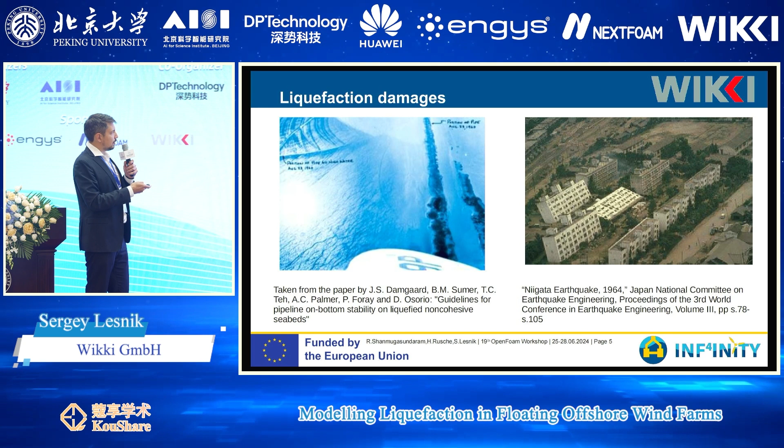Another picture is from Japan, 1964. There was an earthquake, and liquefaction may also happen. In this case, it happened due to waves. In this case, it happened due to the earthquake, which are also waves, actually. But the ground liquefied, and you see here the tilted buildings. So that's also one example.

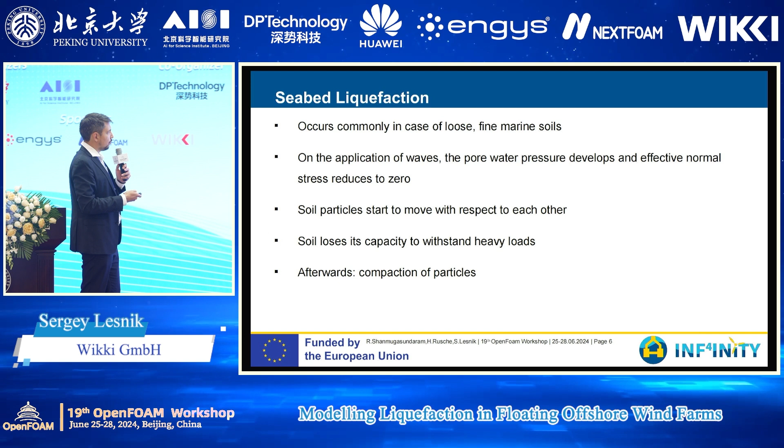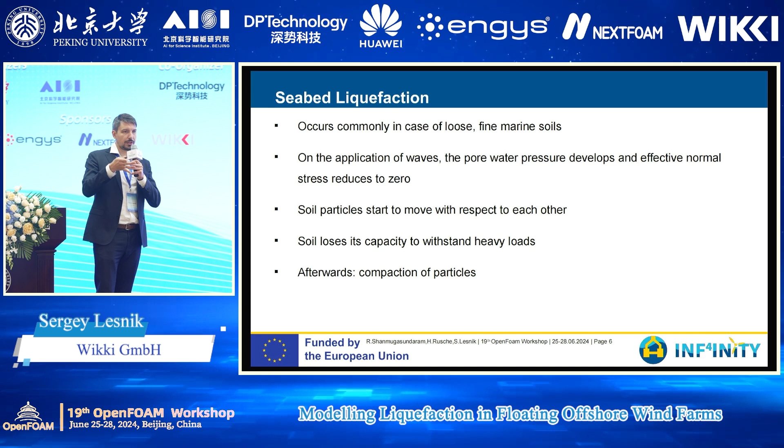Yeah, what is liquefaction actually? It mainly occurs in loose, fine marine soils. How it works: the application of waves builds up the pore pressure in the soil, and at some point the effective stress is reduced to zero. So the soil doesn't hold anymore. The soil particles start to move with respect to each other. The soil loses its capacity, and it cannot withstand load. And load may be an anchor or a pipeline, right? Afterwards, after the liquefaction, there is a compaction process where the soil particles get together again and compact.

So let's see this in a diagram and some pictures here. So here are the soil particles, there is some water trapped in between the particles, and it's some kind of solid structure like this, right? It's actually the seabed. What happens when you apply waves? You can see here on the y-axis we have period-averaged excess pore pressure. So it's the pressure inside these pores between the particles, and it starts to grow, right? You apply pressure,

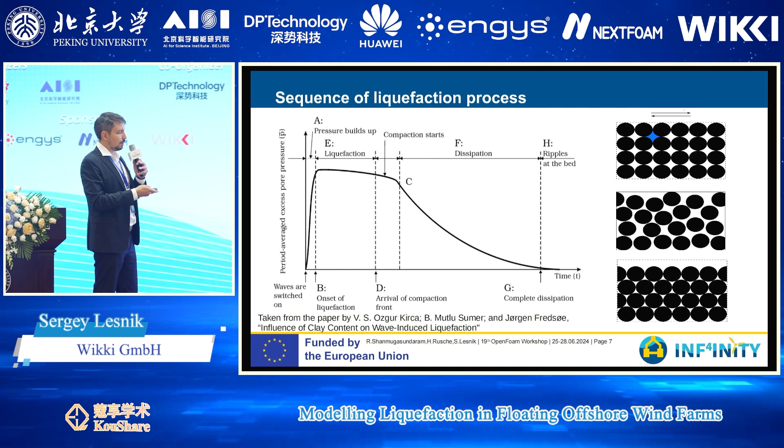and the pore pressure also grows, and this pore pressure may get so high that it pushes away the solid particles, right? So this one, you can see here, that's the phase where the soil liquefies. So there is no structure anymore because everything has been pushed away. But after this, the particles settle down. It's a compaction, and they compact to a solid structure. So we have a phase change here from solid to liquid and again to solid.

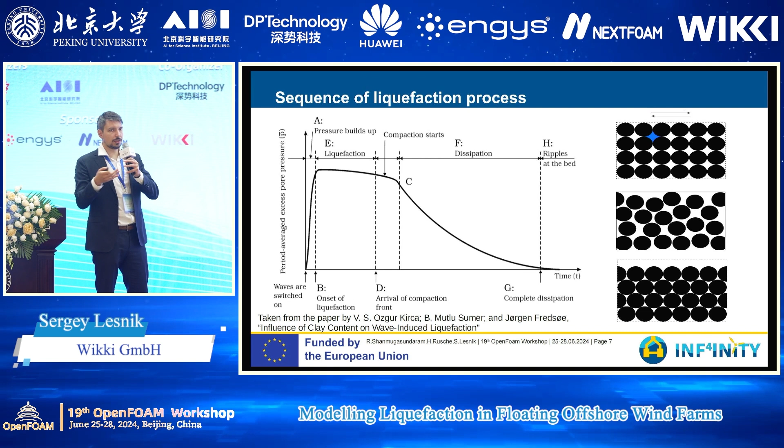What's the motivation? I mentioned it earlier. Here's also one picture. So we have a wind turbine here, and if the seabed is a bit farther away, how it's tied to the seabed, there is a so-called gravity anchor, tied with some ropes, and it's pretty heavy. And the part of our work in this project was to model this gravity anchor. You can see it here. So we have soil, the gravity anchor submerged into water, soil underneath, and there are some regions which liquefy.

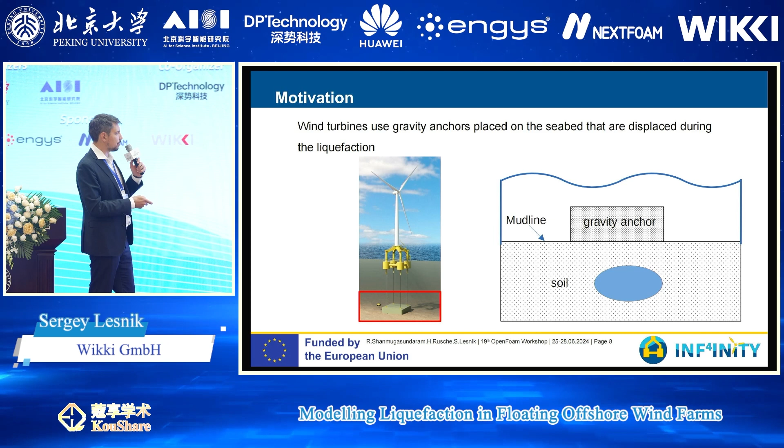So how do we model this? We don't model the water as it is. Here we've got a boundary condition. It's a 1D wave equation actually. Here we've got some soil regions and liquefied regions.

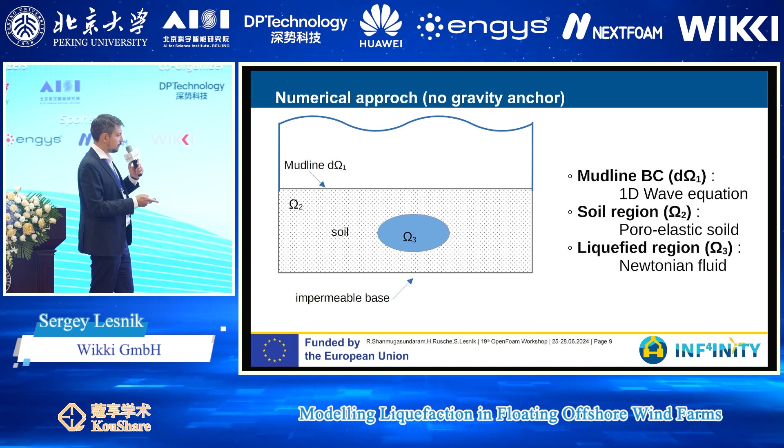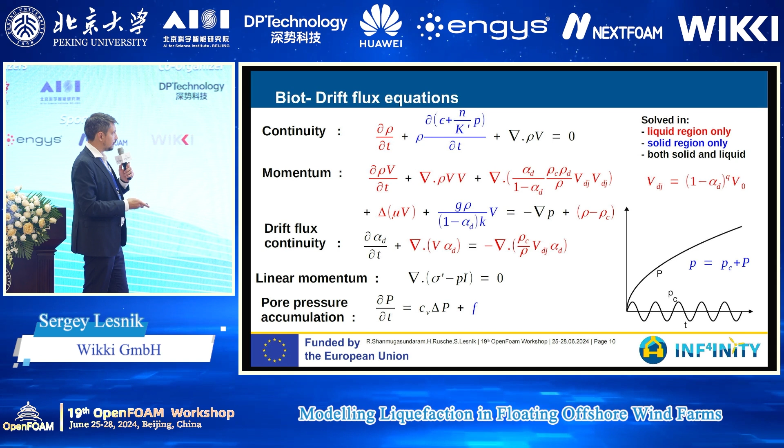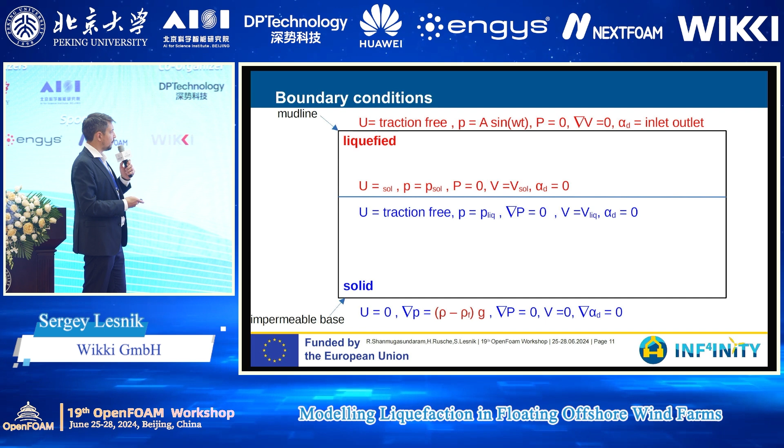Here are the boundary conditions. So at some point we will have a liquefied region here. It doesn't liquefy all at once. It's a process, right? We have some interface or boundary here between the liquefied and the solid region. And because we have this interface, in this case it's a buffer between the two regions, and we need dynamic mesh in order to make it move down, propagate through the domain.

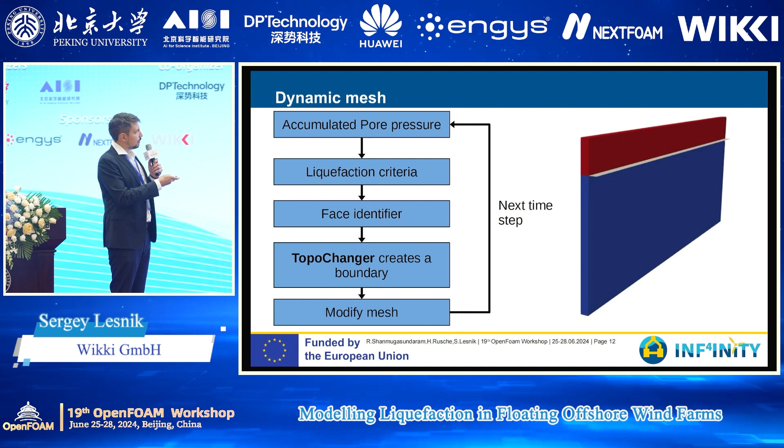And this one is actually a video. Can you play the first video?

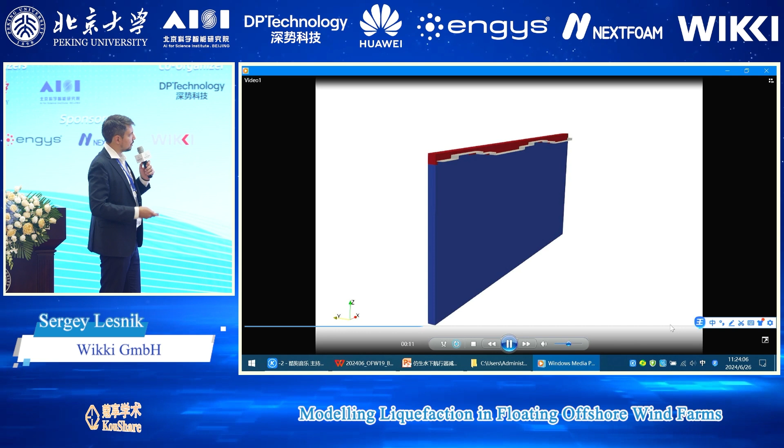So just a video of the propagation of this boundary through the domain. So it starts to liquefy here, and it propagates. You see, this line is actually on the faces of the cells propagating down.

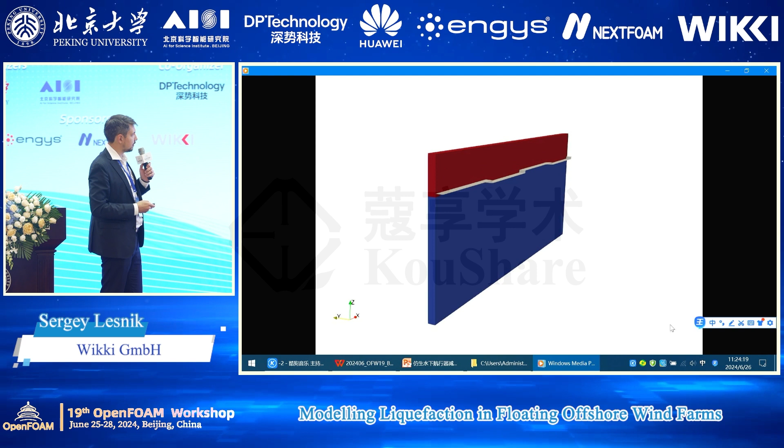Okay, thank you. You can switch again to the slides.

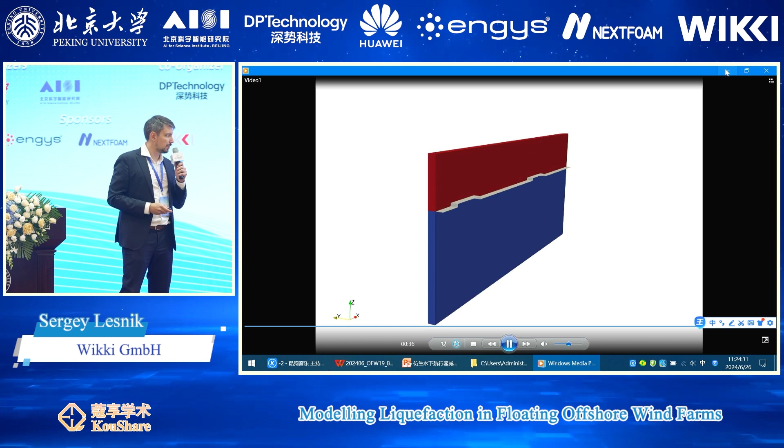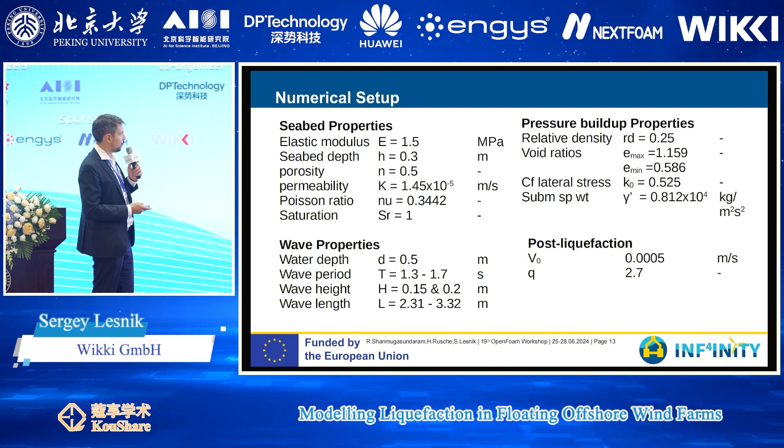There are some properties here for the seabed, wave properties. For the wave, it will be important in a moment. There is a wave period and the wave height, H. Pressure build-up properties, and we need some properties for post liquefaction.

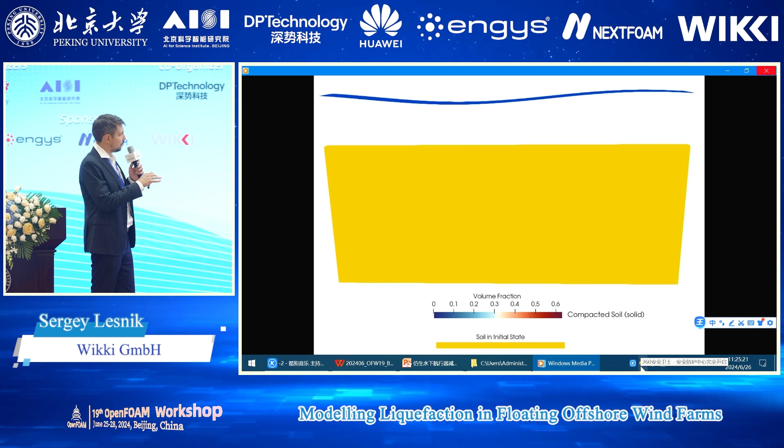There is a second video. So in this one, you will see the process: first, it's a soil in the initial state, the yellow one which you saw. Then it liquefied. The process you see now is actually the compaction. Liquefaction is much faster than compaction, and here in this legend is the compacted soil. Yeah, perfect. It's not liquefied now.

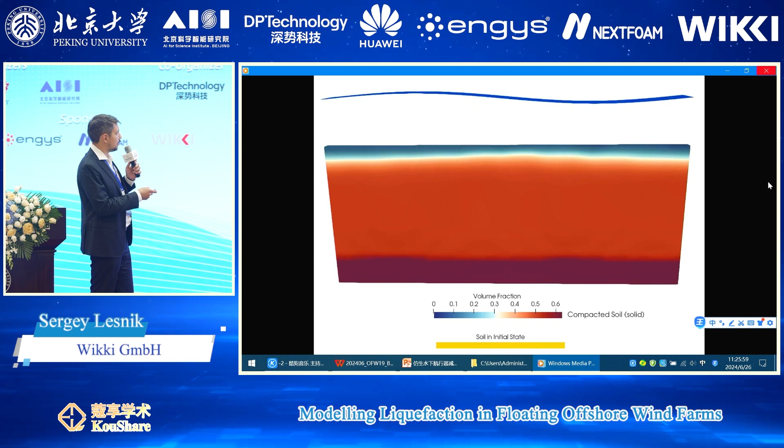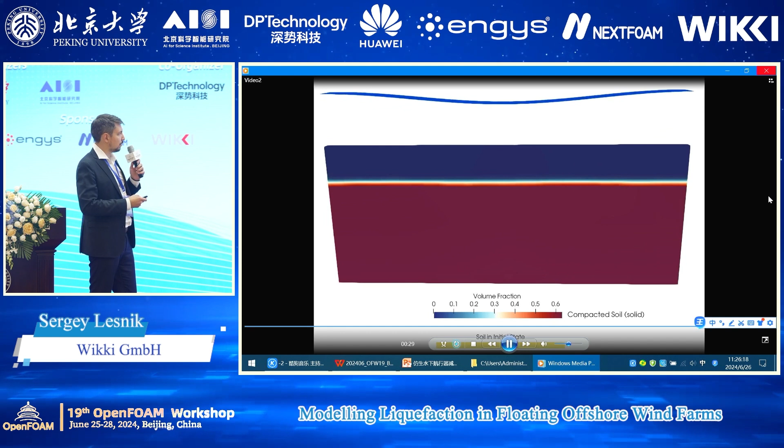It liquefied. This red area is actually liquefied. There are waves, just for the representation, right? And now it's compacting again. And this area above, so after the compaction, you have higher density of the soil, right? So above you got water, and down is the soil.

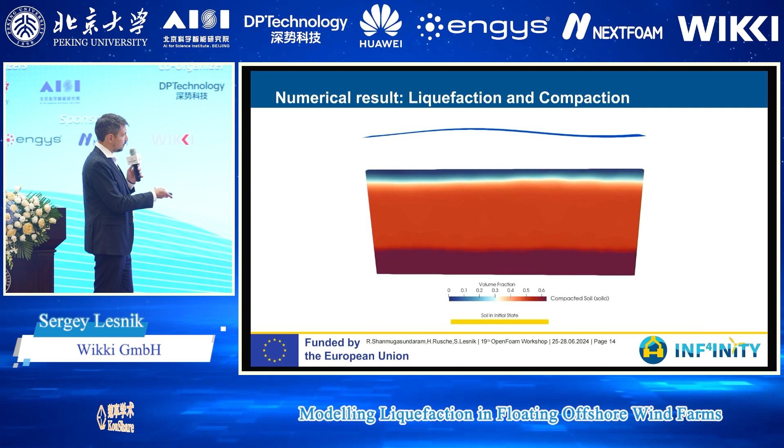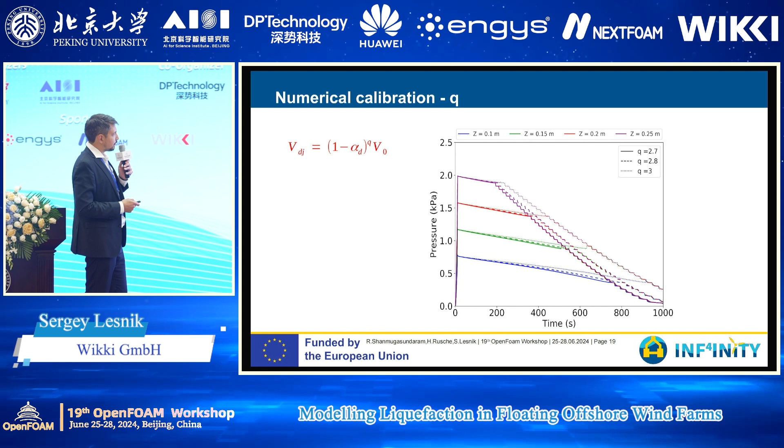And it compacted much earlier than the experiment. The model needs some fine-tuning, so there's calibration in this case. It's part of the drift flux model. There is this Q criterion here, and if you tweak it a bit, you will somewhat increase the time of the compaction. And after this treatment of the Q parameter, we got also pretty good results. So in these models, fine-tuning is also involved.

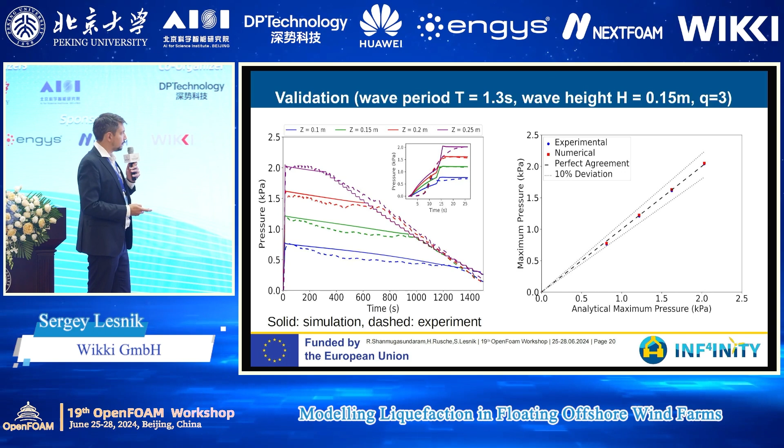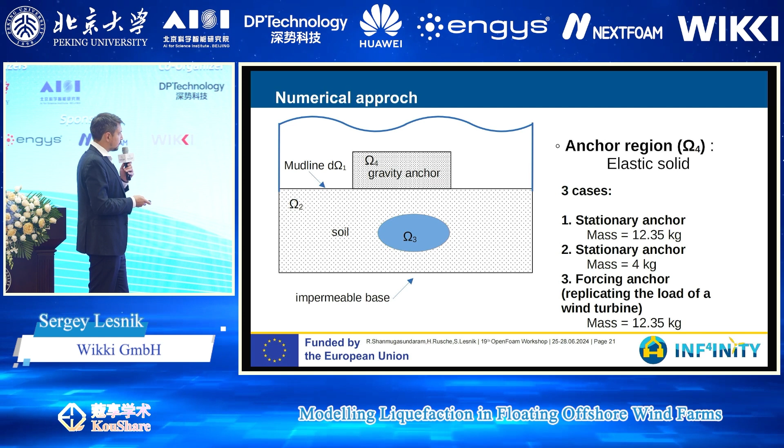All these results were presented without a gravity anchor. So the soil may liquefy also without any load, right? But our interest is, of course, to do it with a load. So it's coming here on top. By now, we don't have the validation here, so it's only the results of the simulation and only of the liquefied region. And we used here 3 different masses of 12 kilograms, 4 kilograms, and there are also two kinds of simulations.

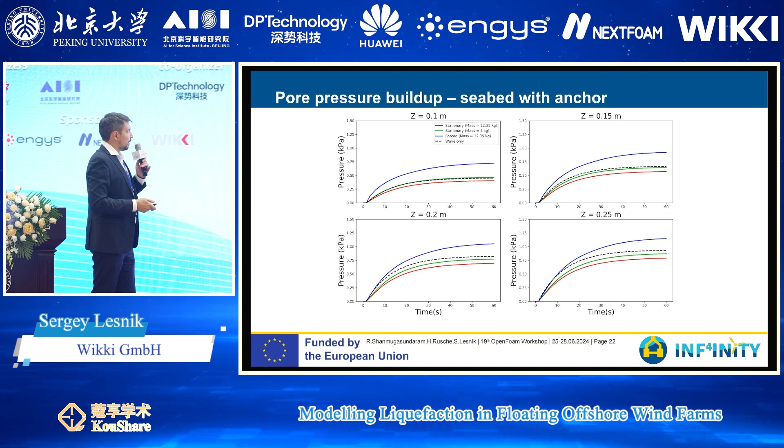One is stationary, so the anchor just lies on the seabed, and the other one is forced. It simulates the impact of the wind turbine above the sea. If there are waves, then the wind turbine moves and it pulls on the ropes at the anchor, right? So the anchor moves a little bit as well. We actually also did this, and as you can see here, it has quite some impact. This forcing shouldn't be neglected.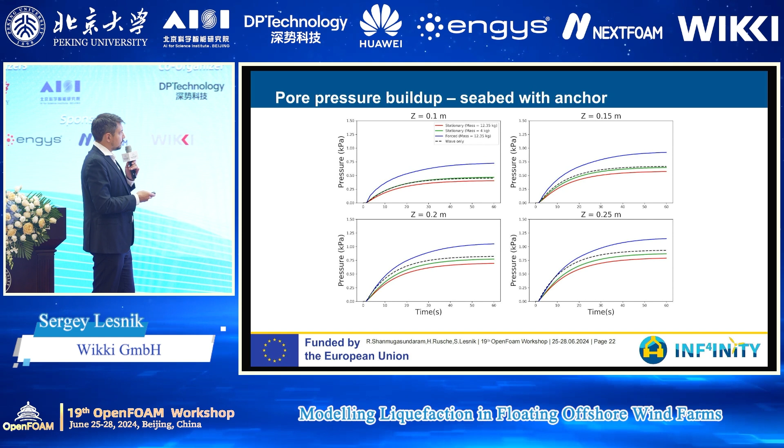So to summarize this, we developed a simulation which can model residual liquefaction and compaction processes. It requires a minimal number of input parameters. It utilizes a poroelastic solid model in the soil region, a Newtonian fluid model in the liquefied region, and then dynamically changes the boundaries in between.

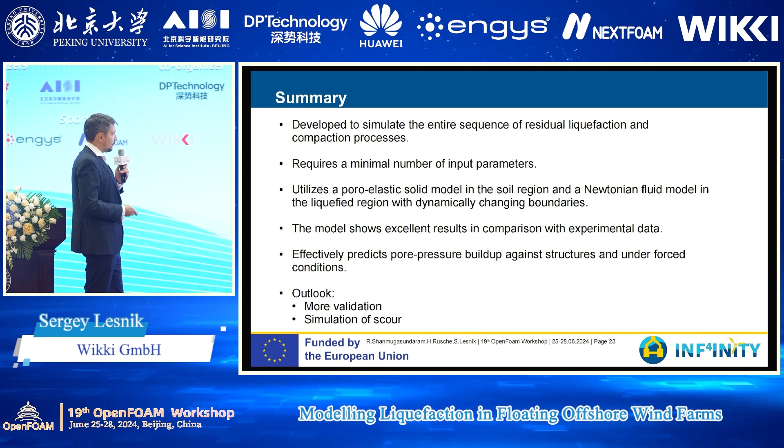The model shows very good agreement with the experimental data, and it can also effectively predict pore pressure build-up also in forced conditions. We need to validate more, and another outlook, ongoing work within the Infinity project, is simulation of scour. And just to give you some pictures, what is it about?

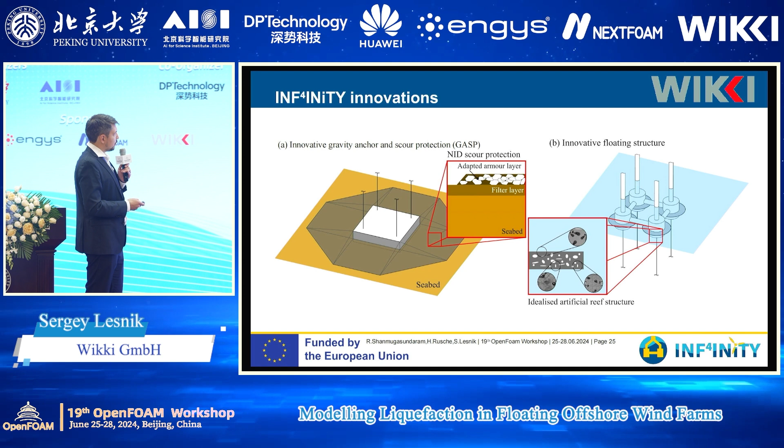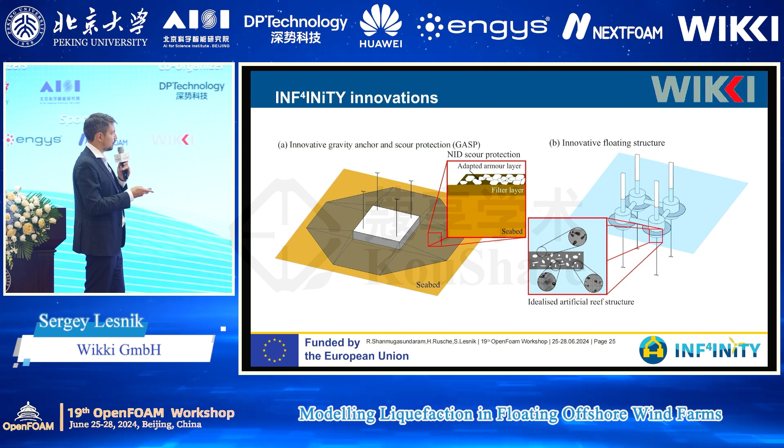So we've got this gravity anchor here on the seabed, and as you've seen in the presentation before by Professor Jasak, the sand may move here and go around this anchor and displace it, or tilt it. So then there's need for some protection measures against this process, against scour. And that's the ongoing work in the Infinity project.

Oh, I see. And so air is completely neglected. The water, to some extent, also neglected. And at this boundary between the sea and the soil, let me show you, there we have this mud line, right? And there we apply this wave equation at the mud line. And this one is only presented here for better representation, but we don't use it in the simulation. Oh, I see. I got it. Thank you.

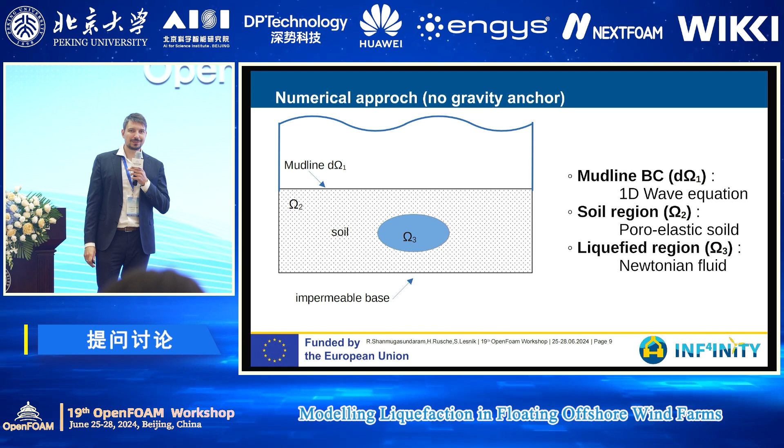Thank you for your report. This is very great. I wonder why did you choose dynamic mesh? I think your equations show that the alpha can show the difference of different phases. So why did you choose dynamic mesh? Thank you. I should mention again the work is not from me, it's from Ranjit, so he's a better partner to ask.

But as far as I know, they maybe considered it, but you've got a lot of numerical errors. If you've got both phases in one cell, then you'll get numerical diffusion, and for this kind of simulation, it's a no-go. It's damaging. You need some interface at the faces for proper convergence. Okay, thank you very much. You're welcome. Are there any other questions or comments?